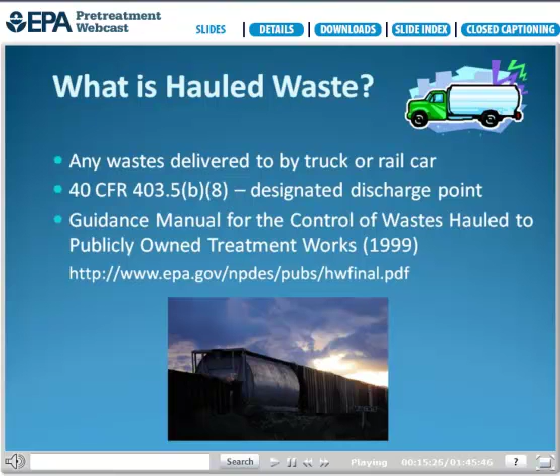Most of what we'll discuss today are recommendations for addressing hauled waste. All POTWs that accept hauled waste are encouraged to consider these recommendations, since they are intended to protect the treatment plant and POTW workers. More details are in EPA's 1999 Guidance Manual for the Control of Wastes Hauled to Publicly Owned Treatment Works. Today we'll refer to it as the Hauled Waste Guidance Manual. It can be found at the website shown on the slide. This manual will be updated in 2013.

Hauled waste may include domestic waste and non-domestic waste. Domestic waste, or septage, is usually generated from residential properties not connected to the wastewater collection system. Non-household or non-domestic hauled waste usually comes from commercial and industrial properties. This waste is typically much more concentrated than regular sewer wastewater. These wastes include grease traps, portable chemical toilets, landfill leachate, groundwater remediation, non-hazardous commercial or industrial waste, and hazardous industrial waste.

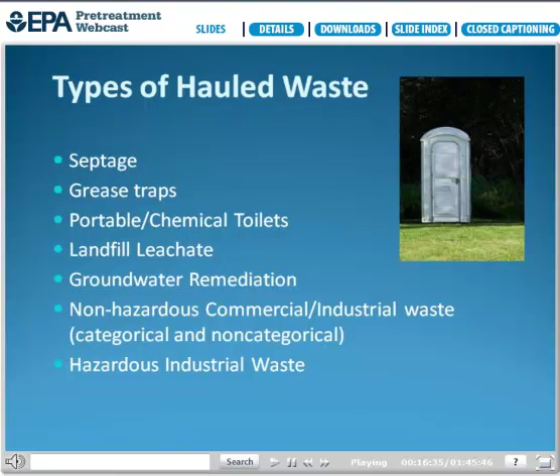Some industrial waste may be generated by processes subject to categorical standards under the pretreatment program. Categorical pretreatment standards are published by EPA for different categories of industrial users and are listed in 40 CFR Parts 405 through 471. We'll discuss each of these waste types in more detail during the second half of this presentation.

Before accepting hauled waste, the POTW needs to consider the potential impacts to the plant, determine what the plant's capabilities are for accepting hauled waste, and characterize the waste to understand what it consists of. We'll discuss each of these considerations in detail in the following slides.

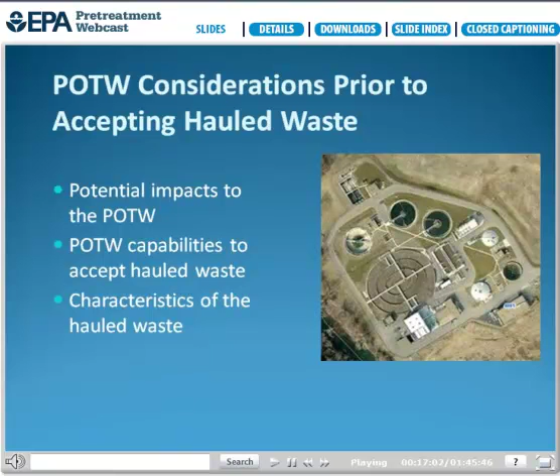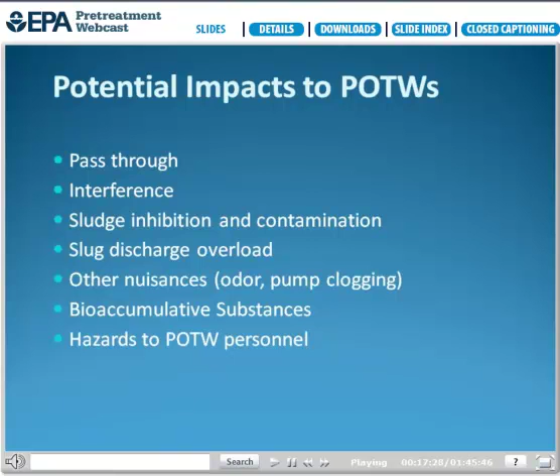Because pollutants are usually more concentrated in hauled waste than in typical domestic wastewater, and because hauled waste may not be equalized when discharged, it may cause adverse impacts to treatment plants. Adverse impacts may include pass-through, interference, sludge contamination, plant overloads, bioaccumulation of toxics, and hazards to POTW personnel.

Hauled waste discharges can cause pass-through at the plant. Pass-through occurs when a discharge from a POTW causes a violation of any requirement of the NPDES permit. Hauled waste can be more concentrated and can cause slug loadings to POTWs, which may cause pass-through and violate the POTW's NPDES permit and impact the receiving water.

Pass-through of metals and organics to the receiving stream can cause toxicity and failure of the POTW to pass the whole effluent toxicity test.

Hauled waste discharges can cause interference issues. Interference means inhibition or disruption of the POTW's treatment processes or operations, or its sludge processes, sludge use, or disposal. Interference can inhibit treatment and adversely impact the biological and mechanical treatment units. The toxic effects of metals and toxic organics contained in non-domestic waste can interfere with secondary wastewater treatment processes and cause the POTW to violate its NPDES permit.

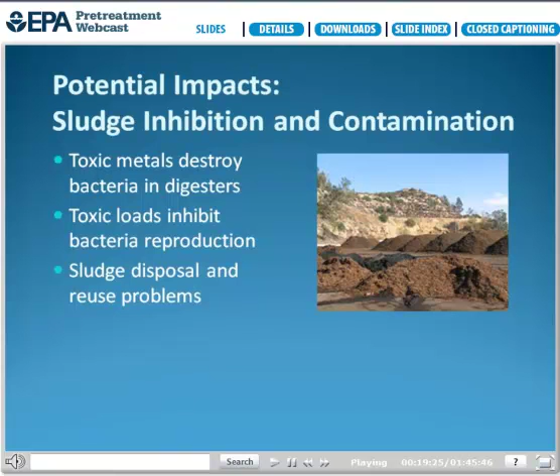Hauled waste discharges can cause sludge inhibition and contamination by overloading the plant with organic and inorganic toxics. Toxic metal compounds in hauled waste can be particularly harmful to the plant, especially chromium, which can destroy bacteria used in the sludge digesters or inhibit their reproduction. This disrupts the sludge treatment process and produces sludge that cannot be disposed of or reused without additional treatment. Activated sludge treatment plants are especially sensitive to large variances in influent concentrations and toxic loads.

Another adverse impact of hauled waste can be a slug discharge overload. If hauled waste is released at a rate that does not allow it to mix within the treatment plant, this could cause a slug discharge that could cause an organic or toxic overload at the treatment plant.

Hauled waste may cause other nuisances, such as objectionable odors, pump or line clogging, foaming at the aeration tank, or additional cleaning and maintenance requirements. Hauled waste could also contain bioaccumulative and persistent substances that are not easily treated at all POTWs.

Bioaccumulation means accumulation of a substance such as a toxic chemical in tissues of a living organism. Mercury and PCBs are examples of toxics that are highly bioaccumulative.

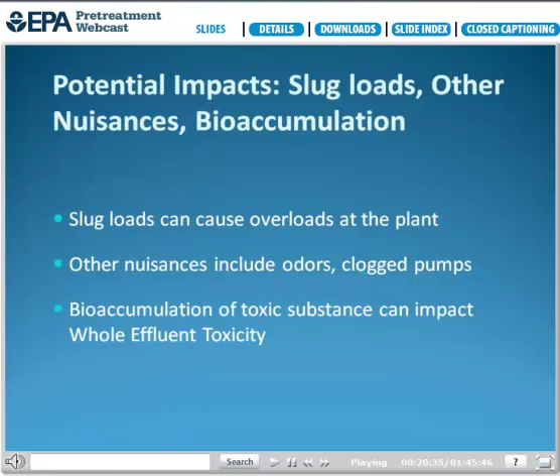POTWs must pay attention to the effects hauled waste may have on whole effluent toxicity, which is the aggregate toxic effect to aquatic organisms from all pollutants contained in a facility's effluent. These toxic pollutants can cause a violation of water quality standard in the receiving stream, even in small amounts, and they could accumulate in downstream sediments, flora, and fauna that may require future remediation.

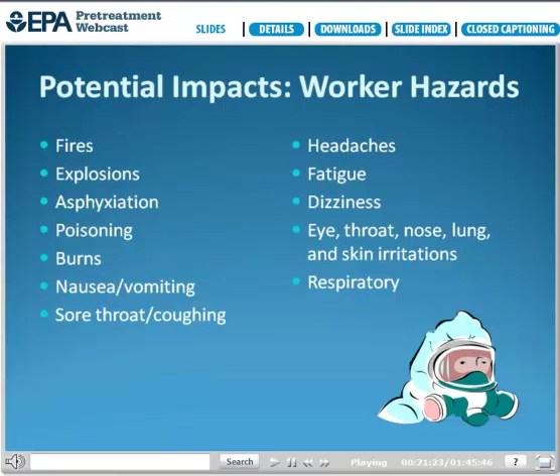Exposure to toxic or hazardous substances in hauled waste can pose dangers to the safety and health of POTW employees. Toxics can volatilize into the atmosphere and workers can breathe it, or certain mixtures of substances can become explosive. Fires, explosions, and poisoning can be the lethal effects of certain hauled substances. Other health effects may include burns, nausea, headaches, and respiratory distress.

It is important to know your treatment plant and know your service area. POTWs should conduct a survey to identify potential waste haulers in the area and to learn what types of waste they haul. The POTW should also determine what types of hauled waste can be accepted based on the plant capacity and treatment capabilities. We'll go into each of these next.

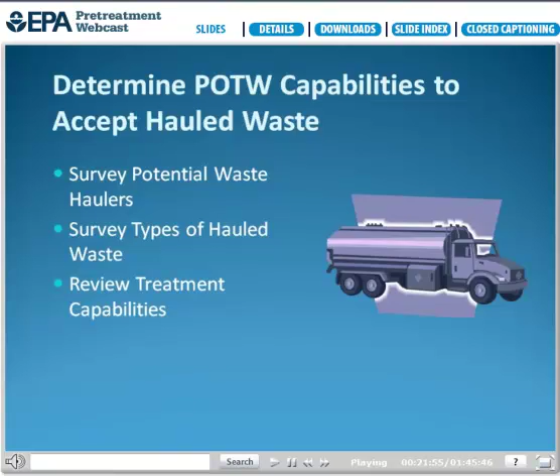As part of assessing POTW capabilities to accept hauled waste, it is helpful to identify all potential waste haulers operating in the area, including those in neighboring jurisdictions.

POTW staff should consult these sources that might have information about waste hauler businesses. These sources include business license records, Chamber of Commerce rosters, local telephone directories, internet searches, city and state industrial directories, state and county health departments, and businesses identified as having grease traps and sand traps, and state lists of hazardous waste generators and treatment storage and disposal facilities.

POTW should keep track of this information and update it periodically. This information can be shared with other POTWs in the area so that they will know about problem haulers that have been turned away before they show up somewhere else.

While identifying the waste haulers in your service area, it is also important to understand the types of hauled waste that could be brought to your plant. The POTW should determine how many of its users, whether domestic or non-domestic, do not have a sewer connection and therefore must haul their waste to the plant.

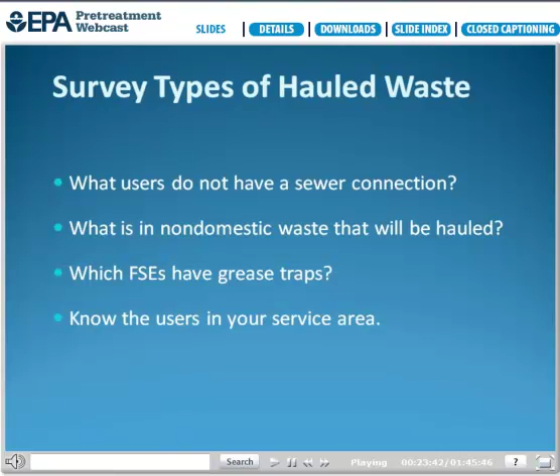If there are non-domestic users that must haul their waste, does the POTW know what is in that non-domestic waste? Does the POTW have a FOG program that requires food service establishments to pump out their grease traps? If so, is that grease trap waste being hauled to the POTW? Know what's going on in your service area as far as what users are not hooked up to the sewer line and will be needing to have their wastewater hauled.

There are several processes for understanding your plant's capabilities to treat hauled waste. These are technical feasibility analyses and local limits development. But first, instead of conducting a careful study of the plant's capabilities to accept waste, sometimes POTW personnel adopt one of two approaches. The first is refusing the waste if it contains pollutants not on a predetermined list of acceptable pollutants at certain levels.

If this approach is taken, the POTW should have some alternatives for where the hauler can go so that the waste is disposed of properly. Another approach is the accept and watch approach. This is when plants accept the waste, monitor it, and record any observable impacts. If there are no adverse impacts, the POTW continues to accept the waste. If there are adverse impacts, the POTW rejects any further waste of that nature or determines what actions may reduce or eliminate the impacts.

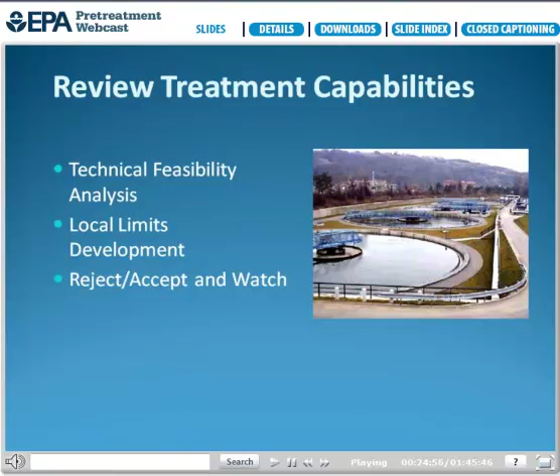Please note that the accept and watch approach places the POTW in a vulnerable position if the waste causes interference or pass-through.

One way to minimize the risk of accepting hauled waste is for the POTW to conduct a technical feasibility analysis. This analysis is similar to and uses information from the local limits development process. It should determine whether the POTW has the hydraulic and organic capacity to handle the additional hauled waste. This process is also normally performed as part of local limits development. POTWs that have not developed local limits should contact their approval authority for assistance or consult the Local Limits Development Guidance.

The POTW should determine if the unit operations are suitable for treatment of the pollutants in the hauled waste. For example, at what loading of total suspended solids, biochemical oxygen demand, or other pollutants does impairment of sludge settling or dewatering occur? The feasibility analysis should also determine if the POTW has the ability to control feed rates of hauled waste to the treatment plant.

Systems acclimated to a specific type of waste can be shocked if waste with different characteristics is introduced suddenly as a slug load. Shocks can be prevented if the POTW has the ability to gradually mix this waste with its other incoming wastewater to minimize or eliminate the fluctuations caused by the waste.

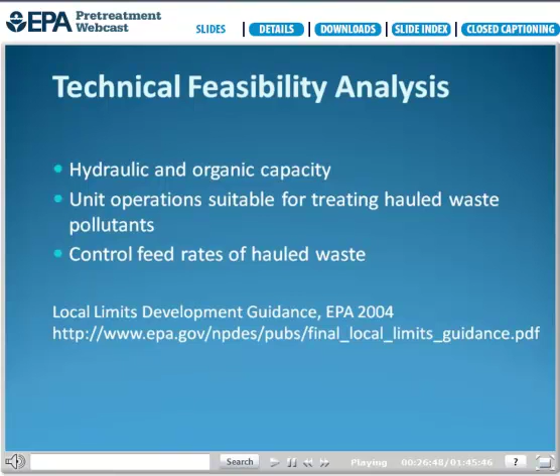In conducting plant analyses, it is always preferred that each POTW use actual values, but if no actual values are available to determine plant inhibition thresholds, for example, the POTW can then use literature values, but should continue to monitor to determine if literature values are protective of the plant.

Local limits development generally includes determining the amount of each pollutant that can be accepted at the headworks and the maximum allowable industrial loadings. This process is helpful in determining treatment capability to accept hauled waste. Local limits do not typically apply to hauled domestic waste; however, some POTWs do apply them, and that is at the POTW's discretion.

Conducting a technical feasibility analysis and local limits development are the basis for determining what type of hauled waste can be accepted at the plant. Again, for more information on the development of local limits, please refer to the Local Limits Development Guidance.

In order to decide whether a POTW should accept waste from a particular hauler, and before a permit is issued, the POTW should characterize the waste to ensure that it won't disrupt operations at the plant. This analysis is important, and POTWs should not accept hauled waste from a hauler that has not been through the characterization and permitting process established by the POTW.

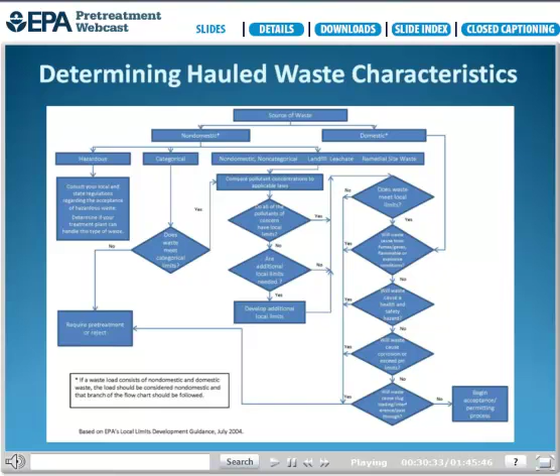Well, that was a brief overview of types of hauled waste, potential impacts, and the characterization of hauled waste. Before we continue with the rest of Lynn's presentation, here is a quick quiz question for everyone in the audience. This is a multiple choice question.

What are potential adverse impacts to the POTW from hauled waste? A, interference. B, pass-through. C, sludge contamination. Or D, all of the above?

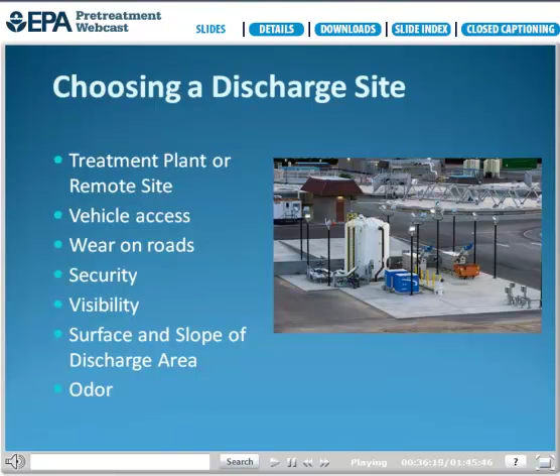Access to the receiving station needs to be controlled to prevent illegal discharges and to have better control over the discharges. Manual locking gates can be installed at the site entrance. Many facilities are now equipped with an electronic card access system. Permitted haulers are given an electronic card which serves as a key to the facility and which may also be used for waste hauler tracking and billing. A potential drawback to this system is that cards may be lent to unpermitted haulers.

If discharge areas are unmanned, security cameras should be used.

When setting hours of operation for accepting hauled waste, POTWs should consider the times when plant personnel are available, when peak and low flows occur within the collection system and treatment plant, and when haulers are likely to want access. 24-hour access may be appropriate for some facilities. It may increase the period of time between hauled waste discharges and increase flexibility for haulers.

We've already talked about using limits and standards to assess whether a waste load will impact the plant. These limits are also controls that POTWs can use to decide to refuse a waste hauler's permit application and reject a particular waste load if applicable numerical limits are exceeded.

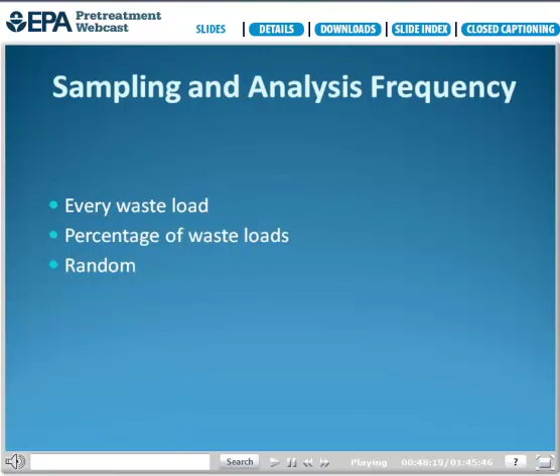The frequency of sampling hauled waste loads is decided by the POTW. It can sample every waste load, a certain percentage of waste loads, or totally randomly. The POTW can also decide if it wants to analyze every sample or collect samples and store them for possible analysis. POTWs establish sampling frequencies based on many things, including impacts on the treatment plant, staffing and resources, and the compliance history of individual haulers.

There are several methods used by POTWs to track hauled waste discharges to their systems. Some have automated systems, where haulers swipe an electronic card with a magnetic strip and information is entered into the POTW's database. Many POTWs still use a paper manifest system to record information on hauled waste.

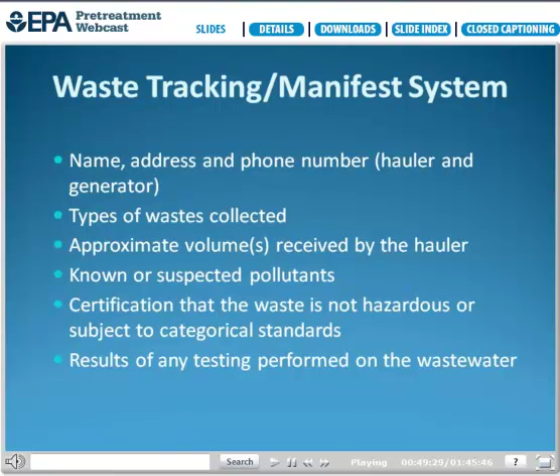Waste haulers enter information on the waste manifest form for each load received. The manifest form and the electronic system should include information such as name, address, and phone number, types of waste collected, approximate volumes received by the hauler, known or suspected pollutants, certification that the waste is not hazardous or subject to categorical standards, and results of any testing performed on the wastewater. This tracking system control can be employed independently of a permit system. Examples of waste hauler manifests are provided in the current Hauled Waste Guidance Manual.

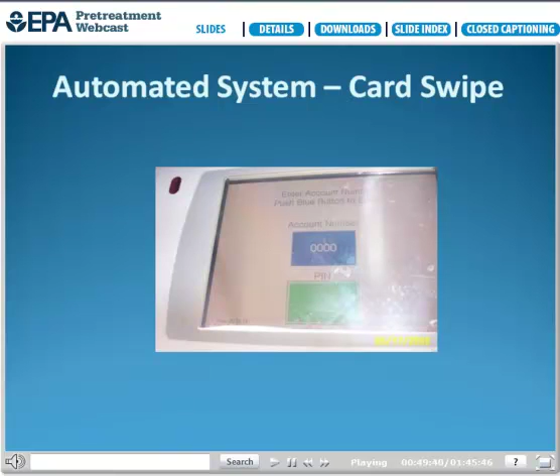Here's a picture of an automated hauled waste tracking system kiosk that waste haulers use at POTWs.

Identification of a waste hauler as the source of pass-through or interference can be difficult. Hauled waste can be discharged to a manhole with the hauler long gone before the waste reaches the treatment plant. EPA has also seen examples where hazardous waste haulers have paid industries for the seclusion their facility provides during such illegal discharge events. Approaches to help alleviate the problem include periodic sampling of suspected sewer lines, surveillance of waste haulers and suspected discharge points, education of industries concerning the seriousness of these violations, increased public awareness of illegal dumping, and increased enforcement. Many states have enforcement programs to assist POTWs in detecting illegal dischargers.

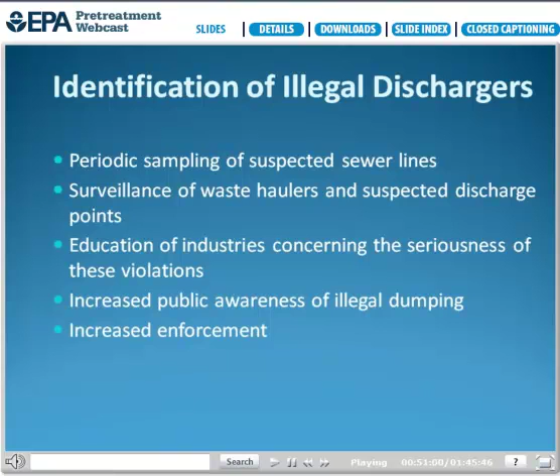EPA's Criminal Investigation Division, the FBI, or local law enforcement officials can also be asked to assist in surveillance activities and enforcement. Video surveillance of suspected manholes or storm drains is also a possible option. Some POTWs lock manholes to discourage illegal dumping at suspected sites.

Good communication with other POTWs and waste haulers is another control. To effectively manage hauled waste, all POTWs within a geographic region should readily share the information they have on waste haulers. When a POTW rejects a load, the operator should contact nearby facilities where the waste may be delivered and inform them about why the load was rejected. If a waste load is rejected, the POTW could also request the hauler to provide information on when and where the rejected load was eventually discharged.

POTWs should also communicate with each other to identify frequent violators. A list of haulers with frequent violations, including type of violation, can be distributed among regional POTWs. POTWs should also have a mechanism to communicate with waste haulers. POTW operators can establish a mailing list of all local waste haulers and provide them with periodic information on changes in plant policy, reminders of existing plant policies that are frequently abused, and changes in operating times and fees. POTWs are sometimes the only source of regulatory information for waste haulers.

POTWs should periodically review and update their hauled waste control methods. Additionally, if the type or amount of hauled waste received changes, the controls should be reviewed to determine if additional controls are needed. For example, if a POTW has been receiving only domestic hauled waste and has implemented procedures to control that discharge, the introduction of hauled non-domestic waste may require additional controls, such as increased monitoring.

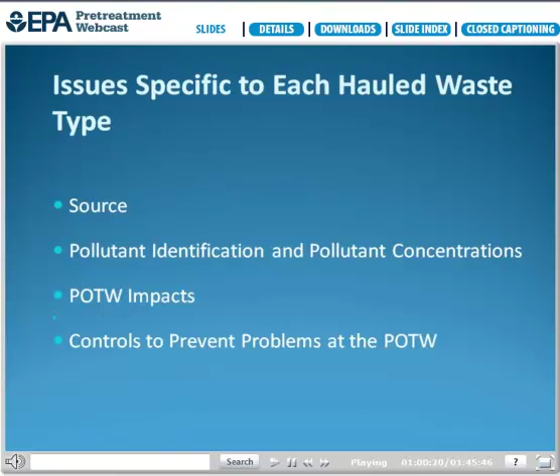I wanted to include a little hauled waste humor as we start out here. If you can't quite see what it says on the back of the truck, the words are 'a flush beats a full house.' So anyway, so much for our humor.

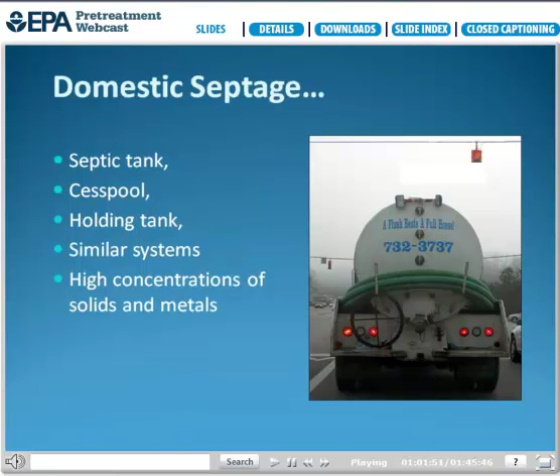Domestic septage waste is defined as the liquid or solid material removed from a septic tank, cesspool, holding tank, or similar system that receives only domestic waste, including household, non-commercial, and non-industrial sewage. Compared to sewage entering a POTW through the sewer collection system, domestic septage is often partially digested and has higher concentrations of solids and heavy metals. Depending on the particular pollutant, septage waste can be anywhere from 2 to 100 times more concentrated than regular domestic sewer wastewater. Again, the wide pollutant concentration range makes site-specific analysis a necessity.

These are typical concentrations of biochemical oxygen demand, or BOD, total solids, and total suspended solids found in septic tank or septage waste. This pollutant concentration data is from the U.S. EPA Domestic Septage Regulatory Guidance document, and I also appreciate Metro Water Services in Nashville, Tennessee for providing data we will present today. We are currently collecting more hauled waste pollutant concentration range data, planned for the update of the Hauled Waste Guidance document. Note that the average BOD concentration can be 20 times greater than domestic sewage coming from the wastewater collection system, and average total suspended solids can be 50 times greater than the domestic sewage in the collection system.

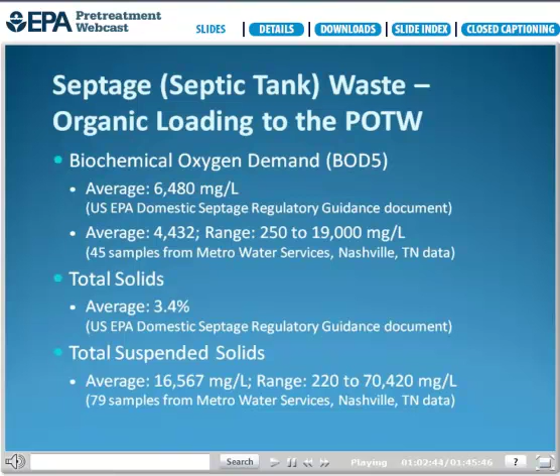Most pH ranges from septic tanks will be in the neutral range. If you conduct a pH analysis of hauled waste identified as septage or septic tank waste, and the result is low, meaning less than 5 standard units, or high, greater than 10 standard units, this should send up a red flag warning you that the waste is probably not septage.

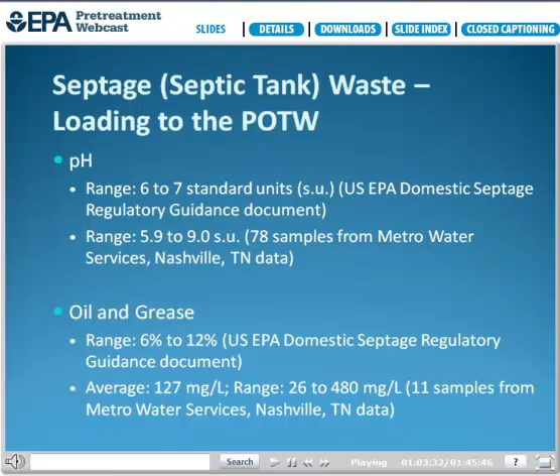The oil and grease results from the domestic septage regulatory guidance documents appear high, with a 6 to 12 percent range. But the main thing to keep in mind is that there can be high concentrations of oil and grease in septage, especially if the septic tank hasn't been pumped in a while and the resident has cooked a lot of fried or greasy food.

I wanted to showcase a couple of septage metals pollutant concentrations to make you aware of the potential impacts on the POTW. Here you can see that zinc concentrations in septage can be very high compared to domestic wastewater coming from the sewer collection system.

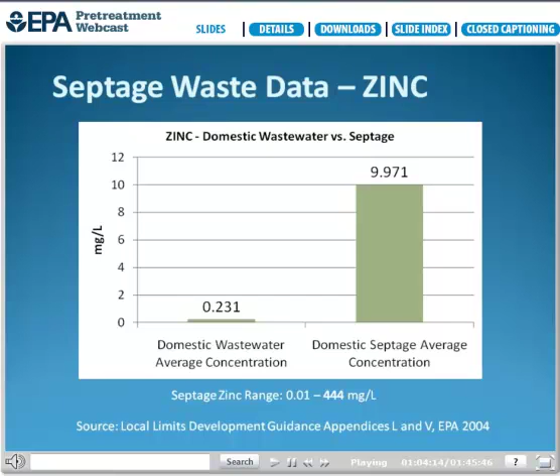Also note that literature values for zinc inhibition of biological treatment systems start near 0.5 milligrams per liter. Of course, each POTW is unique, and zinc loading from septage hauled waste needs to be considered to protect the POTW from inhibition and interference.

Domestic sources of zinc in septage include personal hygiene products, plumbing pipes, and some cities may add zinc polyphosphate to their drinking water as a corrosion inhibitor. Also, zinc is a carrier for many prescription medications. One POTW reported an incident where septic tank waste from an elderly couple's house had extremely high zinc concentrations, even greater than 1,000 milligrams per liter. The source was thought to be medications the couple was taking.

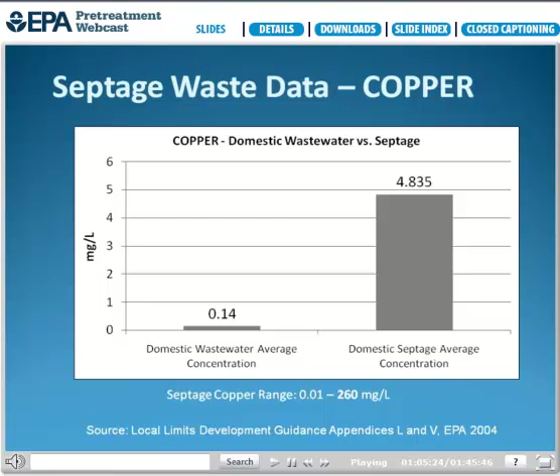Another metal that can have high concentrations in septic waste is copper. One of the main sources is water pipe corrosion. Due to the cost of copper, many new houses do not have copper pipes installed, but copper can still leach from copper pipes over a long period of time. New copper pipes may have copper concentrations of 2 to 6 milligrams per liter.

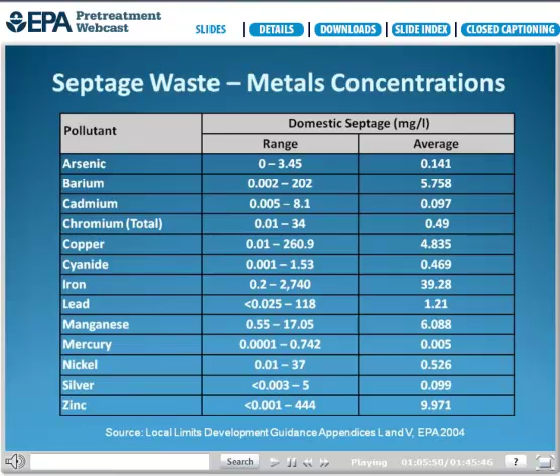As you can see from this list of septic waste metals concentrations, there are several other metals that have much higher concentrations than domestic wastewater from the sewer collection system. Please be aware of the potential for metals concentrations in septic that could impact your plant.

Some other pollutants of concern in septic include ammonia, sulfide, and some organic pollutants. A quick note regarding sampling for organic pollutants: when sampling, make sure you are not near any odor masking agents in the wastewater treatment plant. For example, aerosol sprays that are odor masking agents may contain pentachlorophenol or other organic chemicals. You don't want to get a false positive result from activity occurring in the plant.

Septic controls - Lynn mentioned several, but the waste manifest should include the type of waste, location, facility ID, date and time of when the waste was pumped, hauler's company, and the driver's name. POTW personnel should document any unusual observations in odor, color, or other unusual characteristics of the waste.

We mentioned pH variation of less than 5 or greater than 10 - it's a good indicator that it's not septic tank waste if it's outside of that range. If the waste manifests, visual observations, and pH are questionable, it is strongly recommended to collect a sample.

Some wastewater treatment plants collect a random sample every 10 waste loads. In some cases, a grab sample is collected for metals and organics, and of course a grab sample is required for pH. Some POTWs make a composite sample of the daily septic waste to get an indication of the daily loading to the POTW.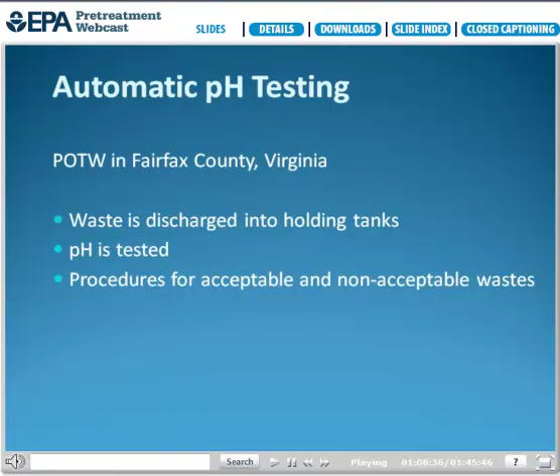Some POTWs have continuous pH monitoring of the hauled waste. An example here is a POTW in Fairfax County, Virginia, which has installed a fully automatic pH screening discharge facility. Waste is discharged to an underground temporary holding tank and automatically tested for pH. If the load is acceptable, waste haulers record the reading from a meter into a daily log. If the pH is too high or too low, the waste is held and POTW personnel are notified by an alarm. The waste is tested once again, and if found to be incompatible, it is rejected and pumped back into the truck.

Other monitoring considerations include not only protection of the POTW but also the POTW workers' safety. Combustible gas meters and oxygen level meters would be necessary, especially if the hauled waste receiving station is in an enclosed building.

Colorimetric tubes work when a measured volume of gas or air is drawn through the tube, which contains chemicals. The color of the tube will change in response to the presence of the specific target gas or range of gases present in the sample.

A redox meter, or oxidation reduction potential (ORP) meter, measures the capacity of a system to oxidize - that means to lose electrons, or reduce, meaning to gain electrons. Chemicals like chlorine, bromine, and ozone are oxidizers. Extreme negative or positive results can indicate potential problems. For example, excessive chlorine in wastewater will result in a large positive value, and the presence of hydrogen sulfide will result in a negative number.

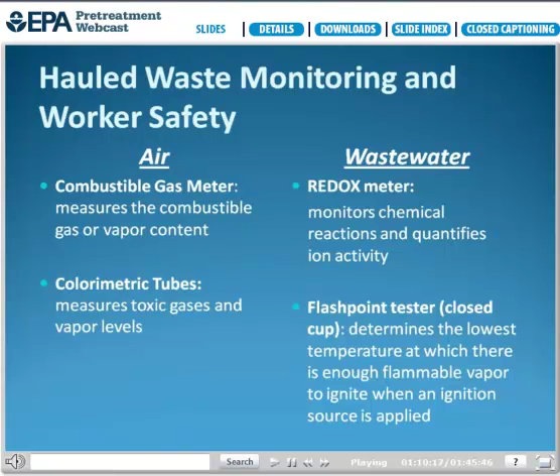Flashpoint testers, or closed cup tests, rely on the fact that a liquid has a vapor pressure which is a function of the liquid's temperature - as the temperature increases, the vapor pressure increases. The test measures the lowest temperature at which there will be enough flammable vapor to ignite in a closed cup situation when there is an ignition source.

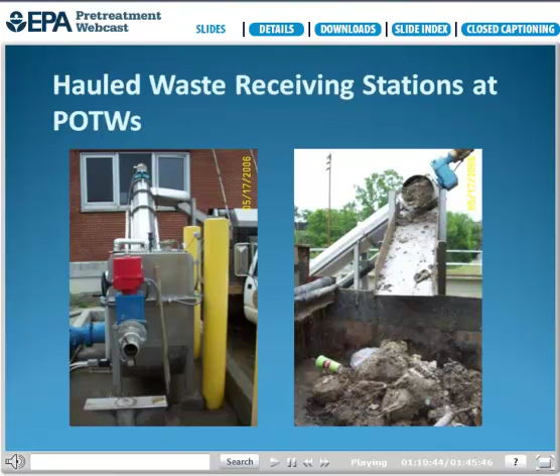Receiving stations - Lynn touched on this. There are a variety of automated grinder and screening devices that wastewater treatment plants use as pretreatment to remove all kinds of material, including plastics, metal, paper, rocks, etc., from the waste prior to treatment in the POTW treatment units.

Fats, oils, and grease, moving on to one of my personal favorites, hauled waste. There are two types of oil and grease waste: animal, plant, or vegetable fats, oils, and grease, or petroleum-based oils and greases. We will concentrate on the animal or vegetable origin FOG waste that is typically collected from grease interceptors and grease traps that collect kitchen plumbing fixture wastewater at food service establishments.

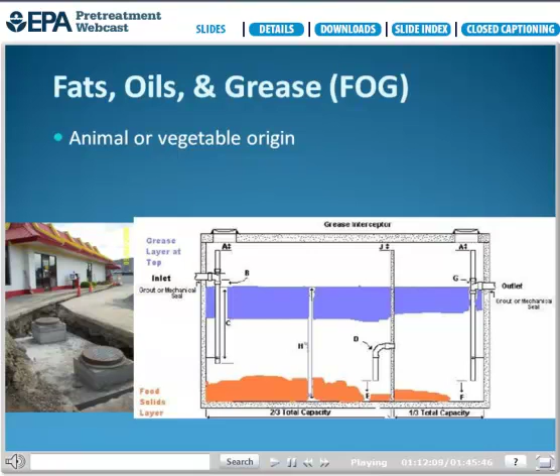The other type of oil and grease waste is petroleum-based waste collected from commercial or industrial sources, such as oil water separators at car washes, auto shops, or stormwater treatment tanks. Petroleum-based oils and grease from commercial and industrial oil water separators can have hazardous or prohibited chemicals that should not be discharged to the POTW. Disposal should be at an approved petroleum waste handling facility.

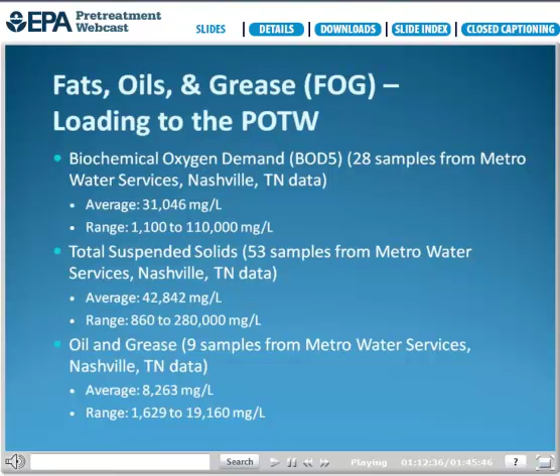You can see from this data that you can expect FOG hauled waste to have higher concentrations of BOD, suspended solids, and oil and grease than septage. Thus, the POTW treatment requirements are greater, as well as the potential for organic overloading, upset, or interference to the POTW.

FOG waste pH can be a problem. FOG is made up of long-chain triglycerides and glycerol, which means there are three fatty acids included. These fatty acids are weak acids, but under the right circumstances can cause low pH problems. Anaerobic conditions in the interceptor or trap, soft drinks, cleaners, disinfectants, and sugars help drive the pH down. Sugars can act as a catalyst for biological activity that drives the pH down.

One food service establishment that made donuts had a deteriorated, leaking grease interceptor due to a pH problem. The pH was 1.7 standard units. This particular food service establishment started adding sodium hydroxide to keep the pH above 5 standard units. It is recommended to monitor the sewer collection system and wastewater treatment plant for pH problems or corrosion impacts, not only at the haul waste receiving station, but also below food service establishments.

As I just mentioned on the previous slide, corrosion problems can be associated with FOG waste and industrial user food or drink manufacturers. Please keep this in mind for your monitoring program.

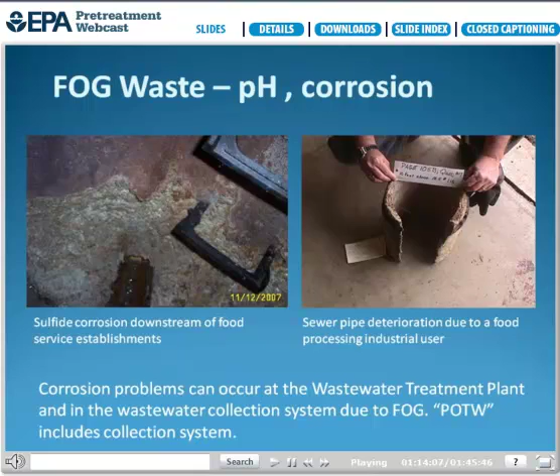FOG can be solid or viscous at ambient temperatures and can cause blockages in pipes, clogging of pumps, and coating and clogging of monitoring probes or float-triggered switches. FOG waste can cause a scum layer to form in the biological processes at the wastewater treatment plant, or contribute to increased nocardia formation in the activated sludge process, which can result in plant interference. Also, FOG waste can cause problems with the sludge dewatering units, such as belt filter press clogging.

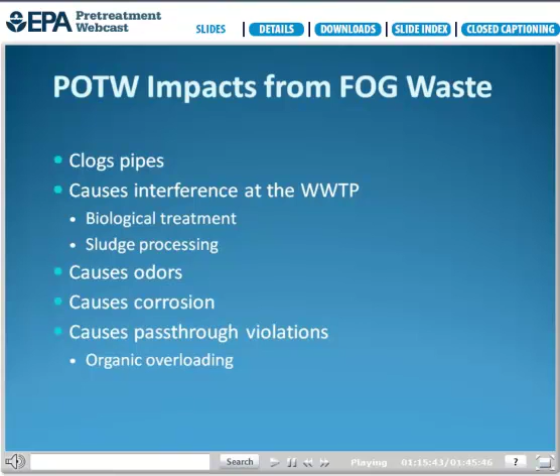We have mentioned the potential problems with pH and corrosion. Organic overloading to the wastewater treatment plant can occur if the FOG waste volume and concentrations are too great for the wastewater treatment plant units to handle. This is especially a concern for small wastewater treatment plants.

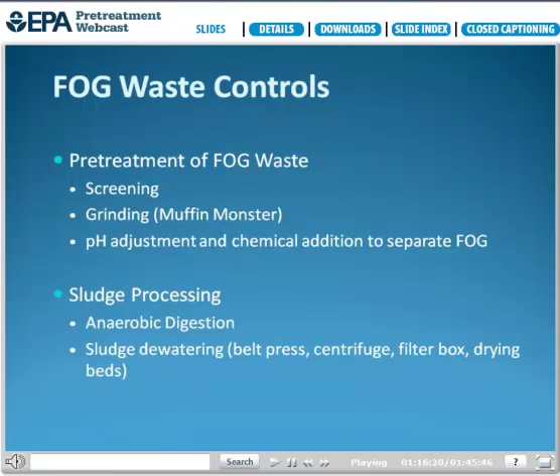If the POTW is accepting FOG waste, then you definitely need some type of pretreatment or primary treatment of the FOG. A number of POTWs are using anaerobic digestion units to receive the FOG waste, which aids in gas production. However, some POTWs have reported problems when the anaerobic digester's recirculation system is not functioning properly. Then there can be a scum layer buildup or other complications. For the sludge dewatering processes, note that there may be odor problems associated with this unless the FOG waste is treated prior to dewatering.

A trend in many cities is fog waste accepted at private treatment facilities. The final product from these facilities is used as fuel and for other beneficial reuse.

On to portable toilets or chemical toilets. Waste from portable toilets, type 3 marine sanitation devices, and chemical toilets is pumped similarly to septic tanks and transported to the treatment works for discharge.

Hauled waste from chemical toilets may be incompatible with POTW operations due to antibacterial and disinfecting agents used. The disinfecting agents and odor masking agents used in chemical toilets can contain organic compounds that may interfere with POTW operations. Also, during winter months in some areas, alcohol or antifreeze has been added by some companies. These organic compounds can be a potential toxicity issue at the treatment plant and can also cause increases in organic loading to the plant.

A note on quaternary ammonium compounds: they can have a surfactant or detergent-like quality that disrupts cell membranes, and they're also bactericidal depending on the concentrations used.

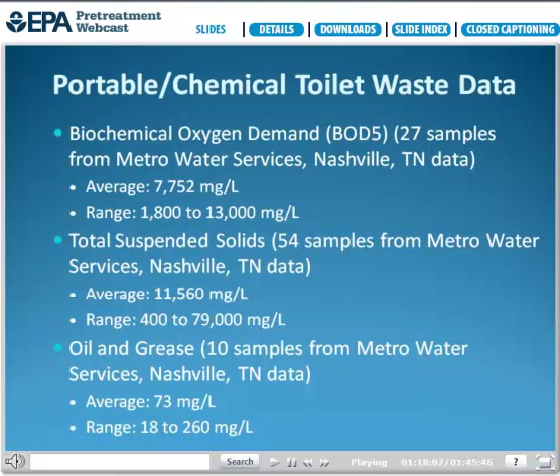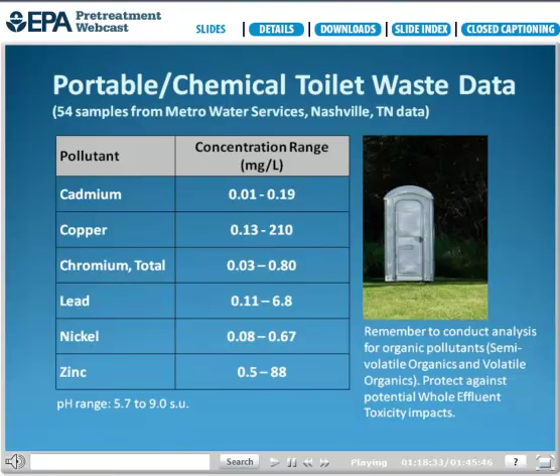The BOD, total suspended solids, and oil and grease concentration from chemical toilets are somewhat similar to septic, as you can see here. Chemical toilet metals concentrations are not normally as high as septic. However, depending on the chemicals used, metals may be increased, especially zinc and copper, which are biological inhibitors. Thus again, the strong recommendation is to know specific details on the chemicals used by a particular company and the pollutant concentrations of the chemical toilet waste.

Controls to protect the POTW specific to portable and chemical toilets include having information on the chemicals used, and it is recommended to require the chemical toilet company to report to the POTW when any chemical mixture changes are made. Note here in the slide about the 1% value.

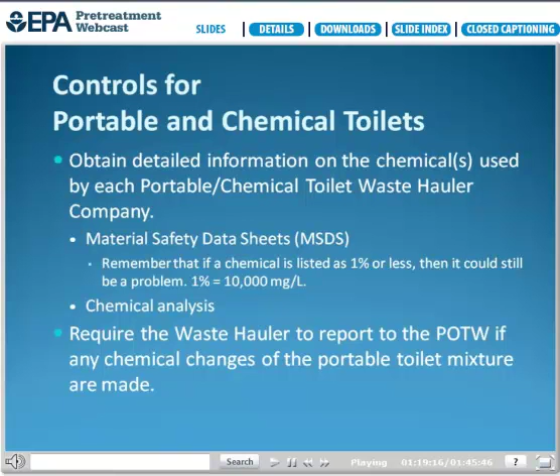1% is equal to 10,000 milligrams per liter. So when someone gives you an MSDS sheet and says their product only has less than 1% of a chemical, that is substantial depending on the type of chemical. Just keep that in mind.

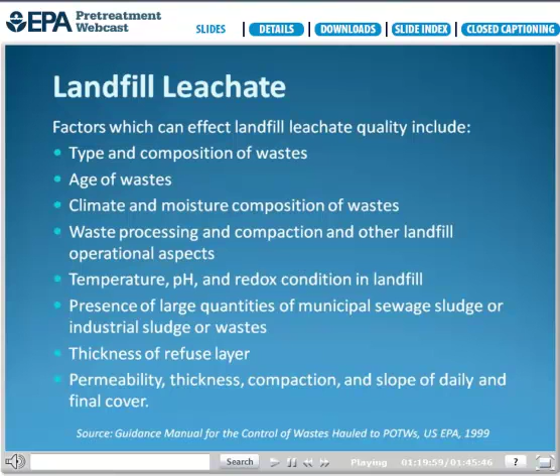Now for some other hauled waste types. Landfill leachate, as defined in 40 CFR 258.2, is the liquid that has passed through or emerges from solid waste and contains soluble, suspended, or miscible materials removed from such waste. The type, age, and location of the landfill and a number of other factors can affect the landfill leachate pollutant concentrations. Again, site-specific data needs to be collected so an assessment can be made by the POTW to determine if the landfill leachate can be accepted at the wastewater treatment plant.

Here are some pollutant concentration ranges for some parameters. As you can see, the pollutant concentration for particular pollutants can be very high for landfill leachate. Also, I want you to know that the proposed development document will also have median concentrations for hazardous waste landfills as well.

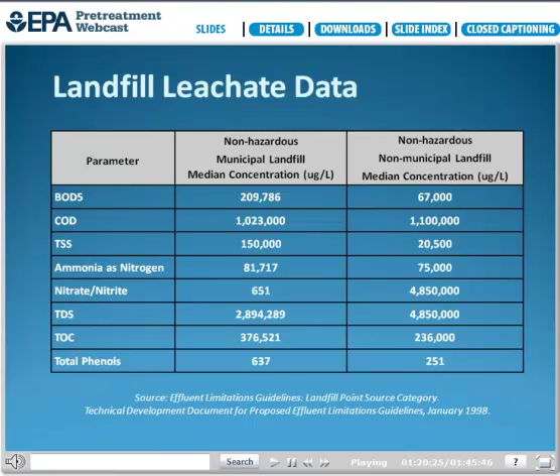Here are some other pollutants recommended to be analyzed to determine if the POTW can accept the landfill leachate. Note that semi-volatile organics, including phenolic compounds and phthalates, and volatile organics, including BTEX—benzene, toluene, ethylbenzene, and xylene—analysis should be conducted for landfill leachate.

I want to make a note on phenol analysis. Several cities have had problems with interference due to using the colorimetric, or 4AAP colorimetric, analysis for phenol, because sulfides and color can interfere. So just keep that in mind when doing analysis for phenols.

The source of groundwater remediation waste is from remediation sites where groundwater is being treated due to contamination. Some remediation waste can come from Superfund sites, under the Comprehensive Environmental Response, Compensation and Liability Act, or CERCLA, more commonly referred to as Superfund sites.

POTWs can determine whether to accept waste from these cleanup operations. In addition, POTWs may require the same controls on these discharges, such as permitting, application of local limits, and other monitoring that would be required on any other waste discharge from any other source.

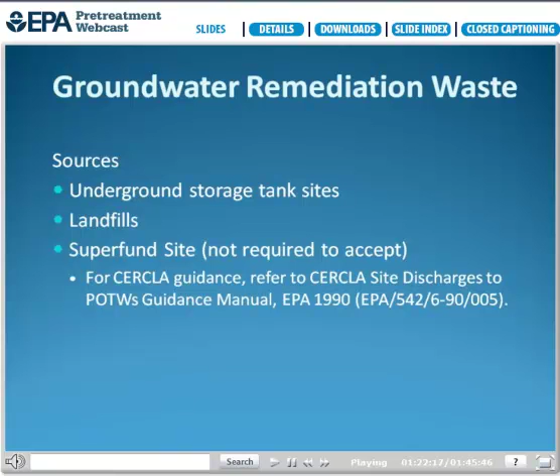Most remediation waste from non-Superfund sites has been treated and contains only trace amounts of toxics that can be accepted at the wastewater treatment plant without causing problems. However, some remediation sites may discharge at a rate or pollutant concentration that causes pass-through or interference.

Groundwater remediation waste associated with fuel-contaminated groundwater may contain benzene, toluene, ethylbenzene, xylene, methyl tert-butyl ether, naphthalene, petroleum oils and grease, and lead. POTW operators should require remediation site operators to provide information on the volume, the pollutants, and the pollutant concentration of the waste they propose to deliver to the POTW.

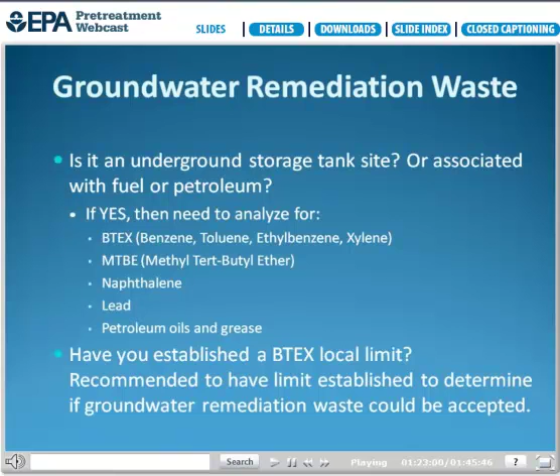Some POTWs have calculated a local limit for BTEX, which greatly helps when determining if groundwater remediation waste could be received at the wastewater treatment plant.

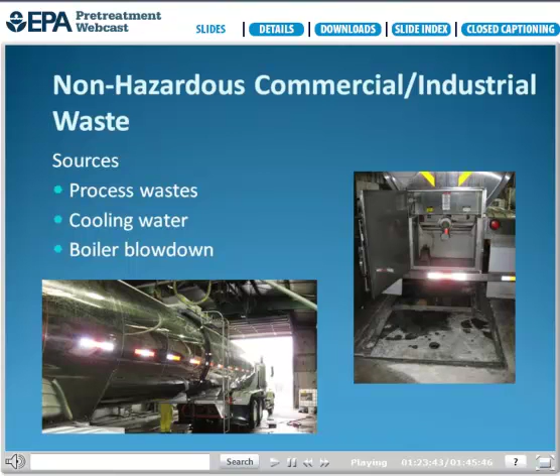The source of non-hazardous industrial waste can come from any number of industrial processes. It includes waste generated by non-domestic sources that are not regulated as hazardous waste under 40 CFR Part 261. This waste may include processed wastewater that an industrial facility decides to have hauled rather than discharged directly to the sewer system, including cooling water, boiler blowdown, and industrial process waste. Industrial waste can be from categorical processes and/or non-categorical processes.

Non-categorical industrial haul waste can include waste from food processing industries, industrial laundries, water softener facilities, and a variety of metal and organic bearing waste from industrial and commercial sources. Hauled waste from food processors can have high concentrations of BOD, solids, oil, and grease that can cause organic overload at the POTW, including upset, inhibition, and pass-through. Industrial laundry waste can have high organics and solvents if they wash shop rags and towels.

If the hauled waste is from a categorical industrial facility, it will be regulated as a categorical industry, and its discharge must meet categorical standards to protect the POTW. POTWs must apply categorical pretreatment standards to waste generated by categorically regulated processes, whether the waste is discharged through the sewer system or hauled to the POTW. An example of this is haul waste from a metal finisher subject to 40 CFR 433.17. They must meet the applicable federal categorical pretreatment standards and limits of 40 CFR 433.17.

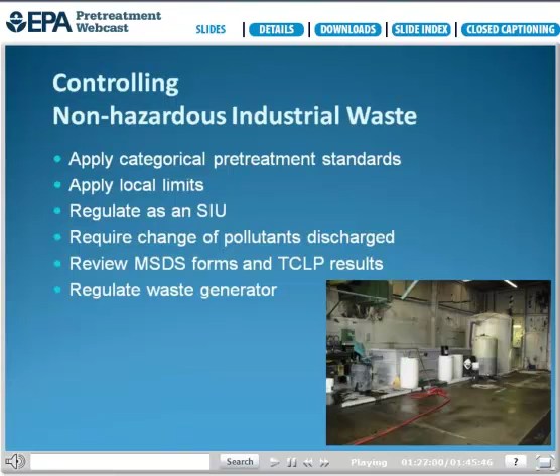A reminder, if you're uncertain about the applicability of categorical standards, the POTW should request a description of activities conducted and what processes generate wastewater to help make the correct determination.

Hazardous waste is defined in 40 CFR Part 261 or 264 as a solid waste or combination of solid wastes which, because of its quantity, concentration, or physical, chemical, or infectious characteristics, may cause or significantly contribute to an increase in mortality or an increase in serious, irreversible, or incapacitating illness, or pose a substantial present or potential hazard to human health or the environment when improperly stored, treated, transported, disposed of, or otherwise managed.

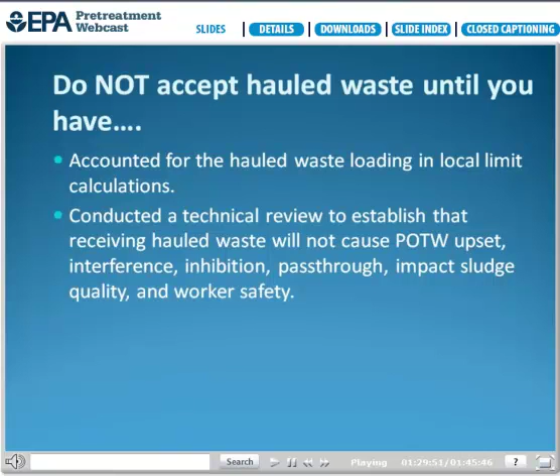To recap, do not accept hauled waste until you have accounted for the hauled waste loading in local limits calculations and conducted a technical review to determine if it will cause impacts at the POTW. Remember, if you're the pretreatment coordinator or on the pretreatment team and there is a plant upset due to hauled waste, you are going to be the one everyone's looking to. So be aware of that, and make everyone aware of their role in protecting the POTW from hauled waste.

A few POTWs apply local limits to hauled waste. However, in most cases, the hauled waste concentrations exceed the local limits. Each POTW should account for the hauled waste loading for each particular pollutant in the local limits calculation. If your treatment plant has not accounted for hauled waste pollutant loadings in these calculations, you should do so, using the formula from EPA's Local Limits Development Guidance document, accounting for each type of hauled waste pollutant loading to the POTW.

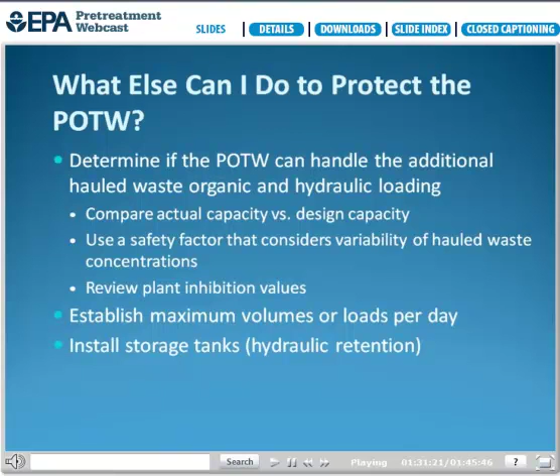What else can I do to protect the treatment plant? When doing the overall assessment, ask questions such as: are unit operations suitable to accept the particular hauled waste? Get samples and identify at what concentration of BOD, solids, or other pollutants the activated sludge units, biosolids treatment, or other treatment units will be impaired. When establishing maximum volumes or loads per day, base this on each particular hauled waste type, not just hauled waste in general, but what type you are receiving or plan to accept at the plant.

And I believe that's all we have time for.

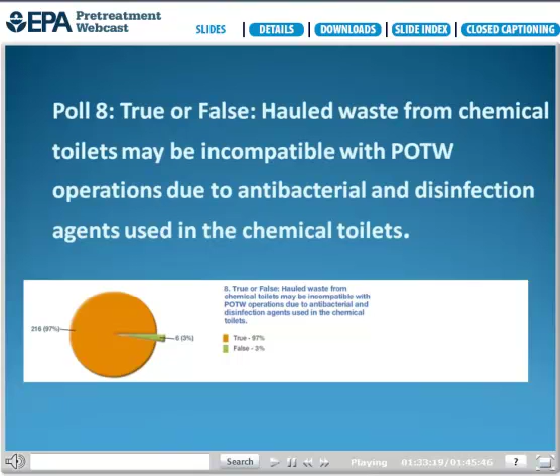Now for the answer. The correct answer is true. The disinfecting agents and odor masking agents used in chemical toilets can contain organic compounds that could interfere with POTW operations. Also, during the winter months in some areas of the country, alcohol or antifreeze has been added by some companies. These organic compounds can not only be a potential toxicity issue at the wastewater treatment plant, but also cause increases in the organic loading to the plant.